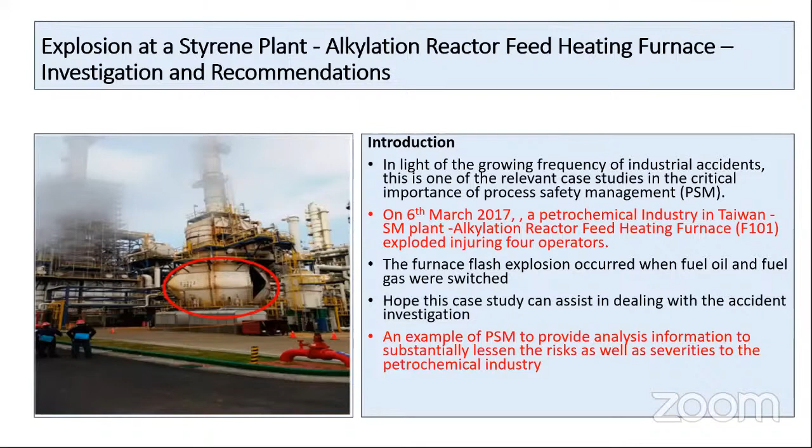Going to the next slide - process in brief. It is a petrochemical industry. I will go back to the first slide. In the light of growing frequency of industrial accidents, this is one of the relevant case studies in the critical importance of process safety management.

On 6th March 2017, a petrochemical industry in Taiwan - a styrene plant, styrene monomer plant - had its alkylation reactor feed heating furnace explode, injuring 4 operators. The furnace flash explosion occurred when the fuel oil was exchanged with fuel gas, that is, they were switched. Hope this case study can assist in dealing with accident investigation. It is an example of PSM to provide analysis information to substantially lessen the risks as well as the severities to petrochemical industries.

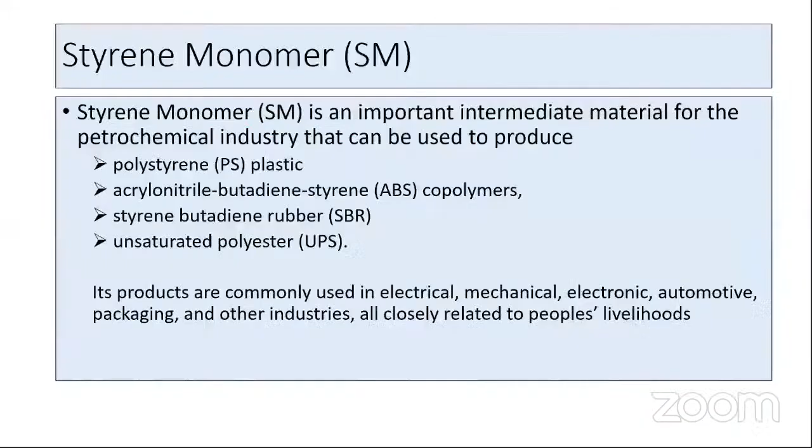Going back to the third slide - fourth slide, sorry. Process in brief. Is everybody with me? Yeah. In general, the styrene monomer manufacturing method is based on alkylation of benzene and ethylene. You can see in this figure, bottom right side, there is a reaction between ethylene and benzene.

Ethylene on the left extreme and benzene on the right top extreme both react in the alkylation reactor to give ethyl benzene. According to the process flow chart, before the raw materials ethylene and benzene enter the alkylation reactor, only benzene must be heated to reach the operating temperature of 700 to 800 degrees or even higher in the feed heating furnace, and then fed to the reactor where ethyl benzene is formed. Ethylene from the left extreme goes to the alkylation reactor, while benzene comes to the feed heating furnace.

Before coming to the feed heating furnace, the benzene is heated - only heated benzene can undergo alkylation with ethylene, at around 700 to 800 degrees centigrade. So it is heated in the feed heating furnace, and then fed to the alkylation reactor where ethylene reacts and gives ethyl benzene.

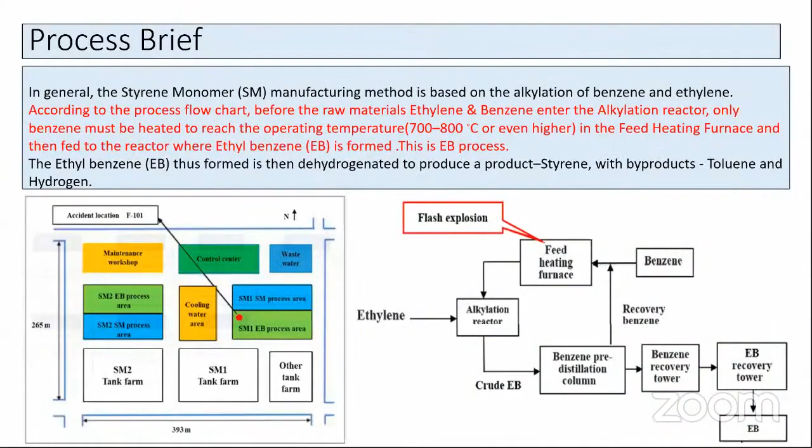At 4:30 to 4:36 a.m., they initiated emergency shutdown in the EB process area, which is the heating furnace area, and then the shutdown occurred. They shut down the ethyl benzene process area. It also damaged surrounding property, such as the ethyl benzene process area and the heating furnace, both of which had to be shut down and repaired.

Accident investigation. Some indirect possible reasons are as follows. After the heating furnace explosion, the operator did not shut down F101, the heating furnace, according to the standard operating procedure. The atomization of fuel and gas continued in the furnace, resulting in flashover under high temperature.

I want to explain here. He did not shut down the heating furnace and the atomization of the fuel. The fuel was in continuous operation, continuous running, and already the furnace was under heat.

During this, I will tell you one thing. From the running condition, fuel oil was initially used in the running condition, and in the running condition itself he switched over to fuel gas. So during this process, while he was using fuel oil, already the furnace surface temperature was very high.

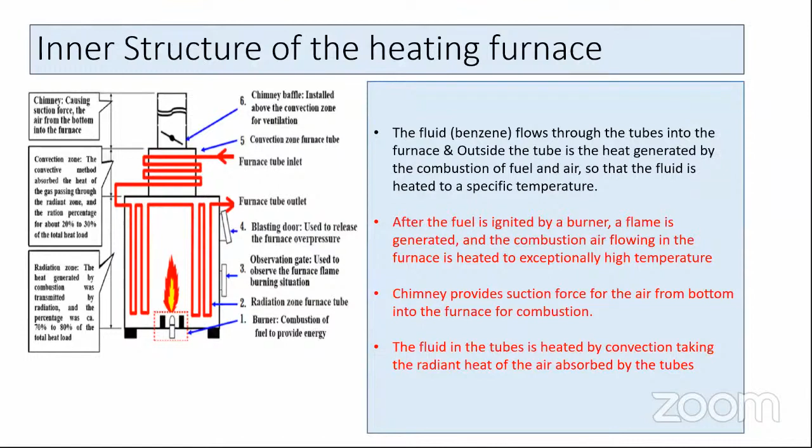Now he switched to fuel gas. So the fuel gas is coming from the burner whose flame was extinguished, and we have three elements now: the gas coming from the burner nozzle, the hot surface, and the air rushing up because the chimney is open. So we have three elements coming into the furnace, and it is enough to cause fire because the concentration is quite enough.

In the fuel adjusting period, the furnace produced black smoke. At this point, on-site staff discovered the flame extinguished and performed the adjustment. Then determined the fuel gasification caused the ignition, resulting in other burners' flames extinguishing instantly.

On-site response time during the abnormal situation was too short. Generally on-site we cannot control the situation because of explosions. On-site response time was very short, too short.

The blast door vent size was not meeting the requirements. I've shown in the chimney structure that the blast door vent size was not enough to meet the requirements. The pressure will be built up, and the pressure should be vented. The chimney's nearest opening is the blast door, which can release the pressure, but it was not enough. Suddenly, since the chimney was opened, it took that route, and the pressure increased and it blasted.

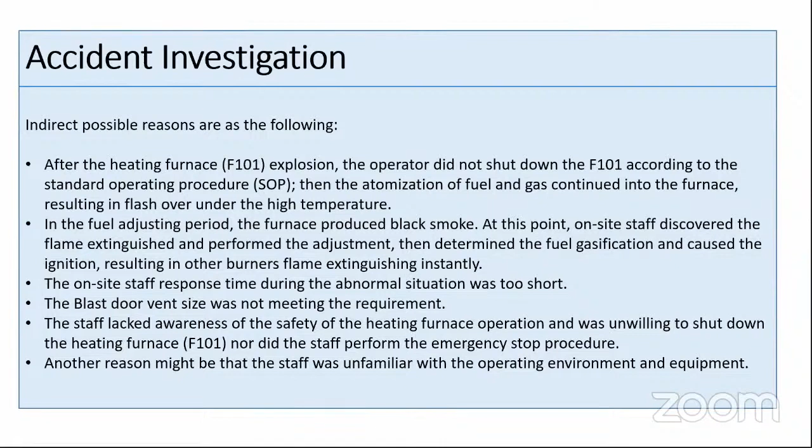The staff lacked awareness of the safety of heating furnace operation and was unwilling to shut down the heating furnace. Nor did the staff perform the emergency stop procedure. So overall, they are lacking awareness of safety of operation and safety of emergency too. Both things they are lacking. Another reason might be the staff was unfamiliar with the operating environment and equipment.

Okay, next slide. Accident investigation analysis. We have just taken the analysis. We have many methods of analysis. Here we have a picture of how accident identification works, so that we can identify the cause of the accident, and the assessment, control, and decision making, like qualitative analysis. The entire thing is a qualitative analysis system, and for risk analysis we have hazard identification. For hazard identification we can use Aloha and FTA.

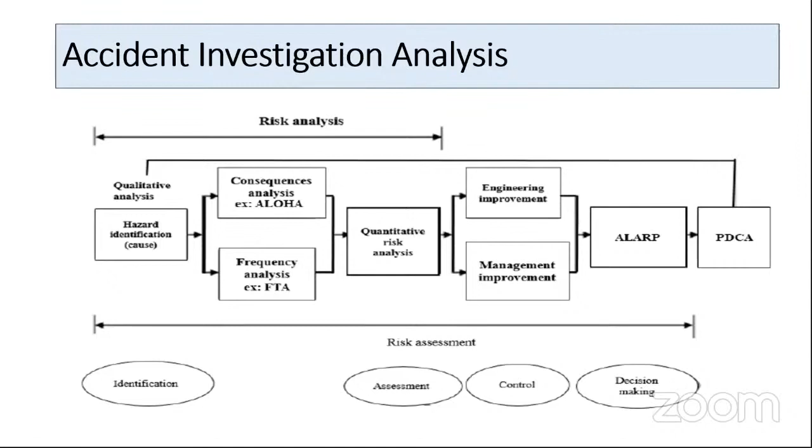Aloha is a software for consequence modeling, and FTA root cause analysis is a top-down approach. We can have that also, and quantitative risk analysis, where from hazard identification we can quantify the risks, and we have control systems, engineering controls and management controls. We have decision making ALARP. Since we have to get through the controls, we can get to ALARP, and we have the PDCA cycle: plan, do, check, and act for decision making.

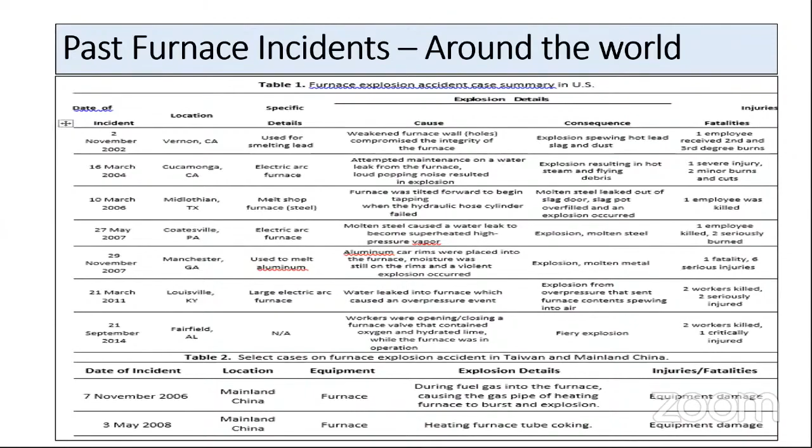This is about past furnace incidents around the world. We have a list of furnace incidents that happened around the world. I can discuss the causes in the next slide.

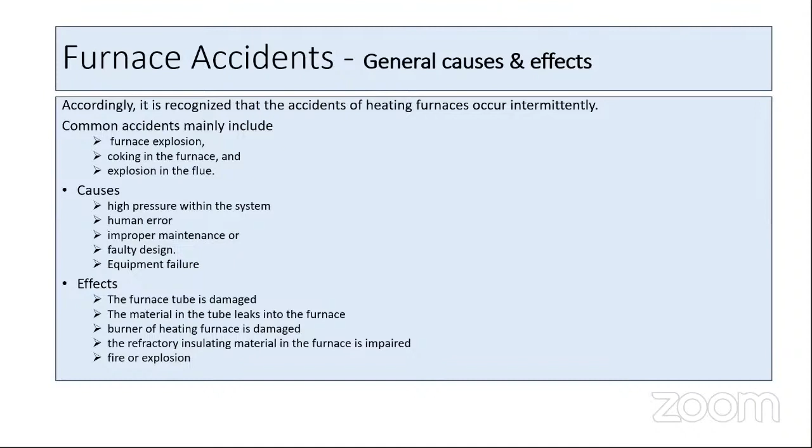It is recognized that accidents of heating furnace occur intermittently, and common accidents mainly include furnace explosion, coking in furnace, and explosion in the flue. The causes of accidents are high pressure within the system, human error, improper maintenance or faulty design, or equipment failure. Effects: the furnace tube is damaged, the material in the tube leaks into the furnace, the burner of the heating furnace is damaged, refractory insulating material in the furnace is impaired, and fire and explosion occur.

We have used the concept of hazard identification, risk analysis, risk control, and decision making. In hazard identification we already discussed Aloha and FTA, and for risk analysis, qualitative and quantitative analysis methods to implement risk assessment, and risk controls. We have engineering and management plans for decision making and so on.

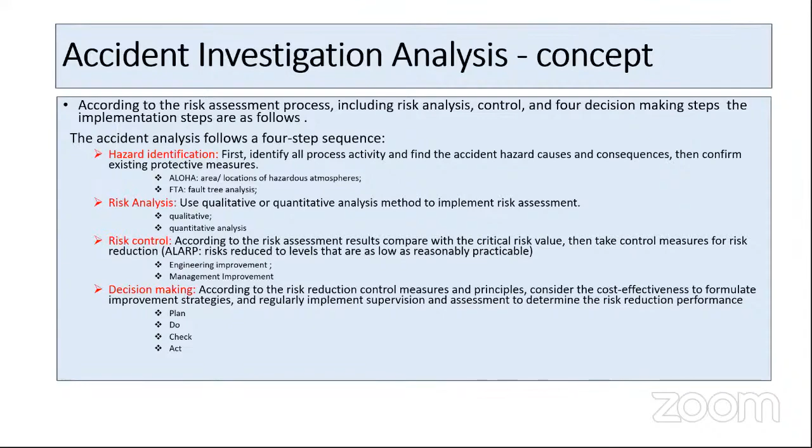For accident investigation analysis, we have PHA, the process hazard analysis element, and FTA. It forms a PSM element, process hazard analysis. One method is FTA, using what-if analysis, and event tree. That is the fault tree analysis concept.

Fault tree analysis was developed by Watson and A. Mearns at Bell Telephone Laboratories in 1962, in the area of the American telecommunication industry. It was first used in the telecommunication and aircraft industries for missile failures. FTA was applied to missile failures by the USA, and later NASA, other electronic industries, and software companies also started using it for safety analysis.

FTA is an effective tool widely used to find system reliability, maintainability, failure probability, failure rate and repair rate, and for system analysis. So for system reliability, maintainability, and safety analysis, FTA is a widely used effective tool.

FTA is a top-down approach with an undesirable event. You can see the figure with the top event. It is a top-down approach, meaning the first element is at the top - here, explosion occurred in the heating furnace. That is the top-down event, the undesirable top event, which is the explosion.

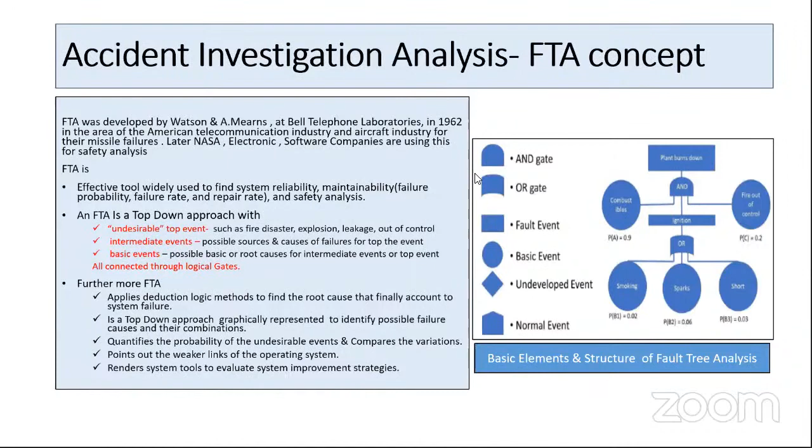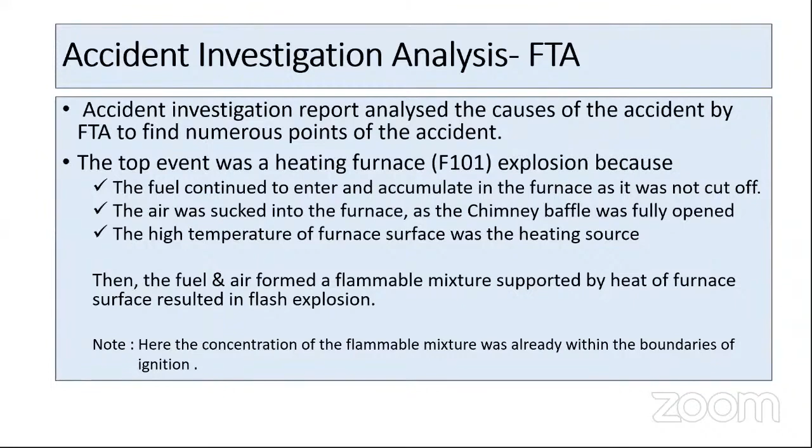Okay, next slide. Murthy, take another 5 minutes and you can close it. Okay sir, then I'll quickly go to... see next slide, you can see FTA. I'll go to the 17th slide. No, I'm not able to see the number. Okay, 14, that is okay. Keep that slide, that is very important.

See, we have this fault tree establishment tree. This is taking the heating source that heat furnace explosion. We have three things here: heating source, air, and excessive combustible materials. So we can draw our fault tree in this manner. We can give the names like T is our top event, X1 is X1, X2, X3 are the intermediate events, X4, X5 - all these things are just given as labels.

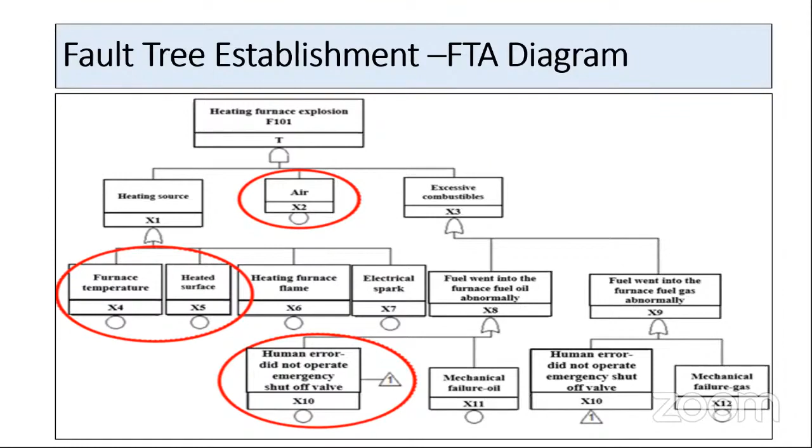So we will go to the 17th slide. I think go to the third slide. Next, third slide, I will tell you.

Using the basic fire triangle, we have flame, ignition source, oxygen, and fuel. Applying this same principle, we have developed heating elements - heating elements with furnace temperature X4, X1 is the heating source, and X4, X5, X6, and X7 are the heating sources: furnace temperature, heat surface, heating furnace flame, electric spark.

We have taken some possible causes. So X2 is air, X3 is excessive combustibles. Under that, other causes are abnormal fuel flow, abnormal gas flow to the furnace.

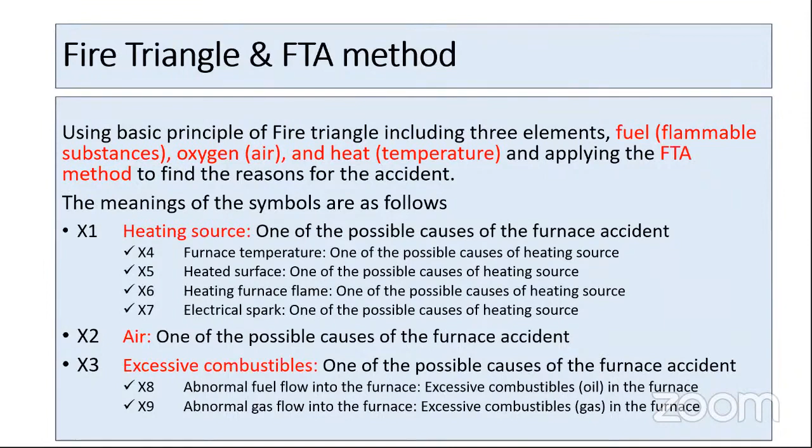Next slide, next slide.

X10 is human error, which is also a possible cause - did not operate emergency. X11 is mechanical failure due to oil, X12 is mechanical failure due to gas. T is the heating furnace explosion - that is the undesired event. So we can see intermediate events and basic events classified under this. These are the failure events - the intermediate failure events and the basic failure events. So the failure causes or events are one and the same.

So we will form an establishment tree, and then we will form some equations. T equals X1 - you have seen X1 is the heating source, X2 is the air, and X3 is the excessive combustible. So we go to the top undesirable event, and we can multiply the probabilities X1, X2, and X3.

Now we are taking failures into consideration. We can take two ways: one is air, fuel, and heating sources, or air, fuel, and human errors. We can get the top-down approach either this way or that way. So we have taken two equations, 2 and 3, just to remember. If you multiply all the elements one by one, you get this big equation.

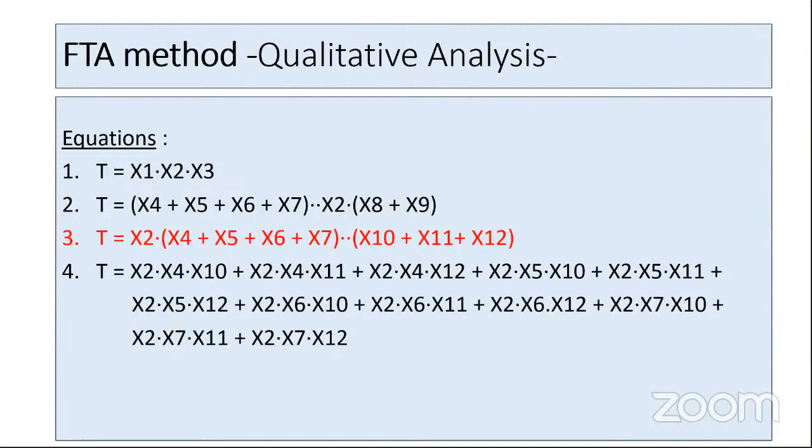Next slide. Each element multiplied to each other gives equation 4. Next slide. So we have minimum cut sets also.

This is another method. A minimum cut set is a combination of basic events which could lead to the top event occurring. It cannot be simplified further and still ensure occurrence of the top event. If the MCS is in a failed state, the entire system is out of order.

From the above results, we could find the key factors of the top event are air, any heating source, and human error or mechanical failure. In general, an MCS containing only one basic event - suppose the minimum cut set has one basic event, it's more likely to cause failure. Only one basic event will lead to more system failure than an MCS containing two basic events.

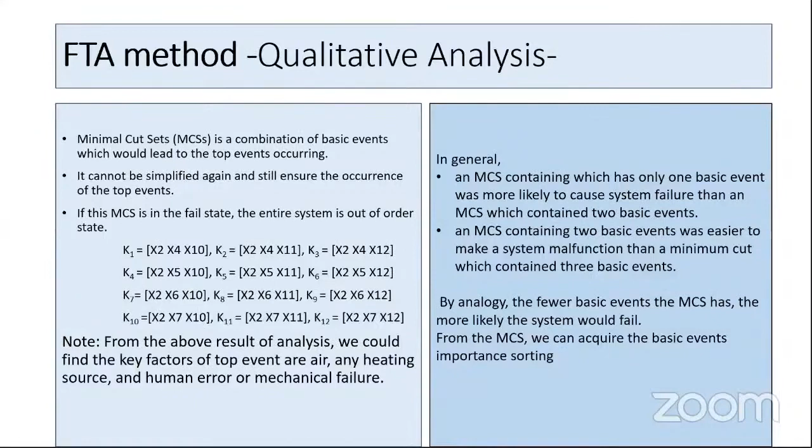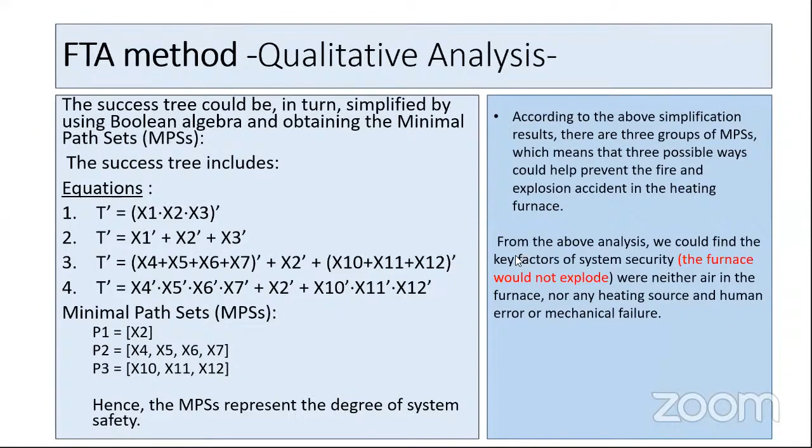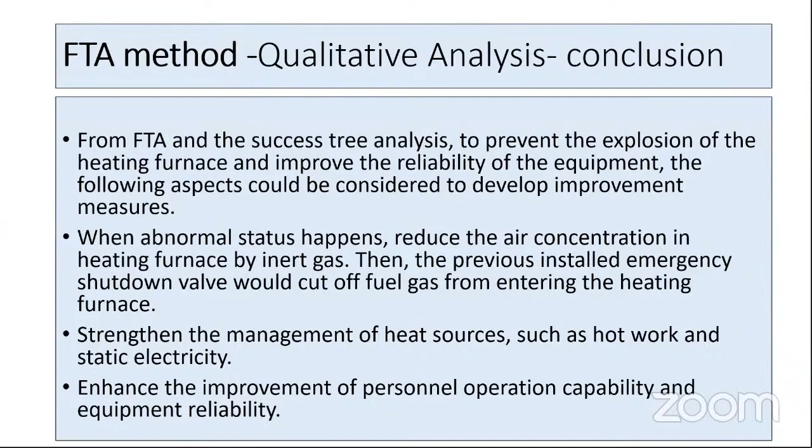This is the minimum path set. Minimum path sets represent success. This is another MPS method - if you have a minimum pathway, the furnace will not explode. So if you identify a minimum pathway that avoids explosion, it can be explained. We also have Aloha, which is a consequence modeling tool to analyze the minimum distance where the more significant impact of an explosion can occur.

Now let's look at results and analysis. We learned from this fault that it was caused by high temperature. The explosion occurred due to high temperature sources, mixed flammable gases, and human factors. Human factors include misoperation, misjudgment, untimely action, lack of training, and lack of skill.

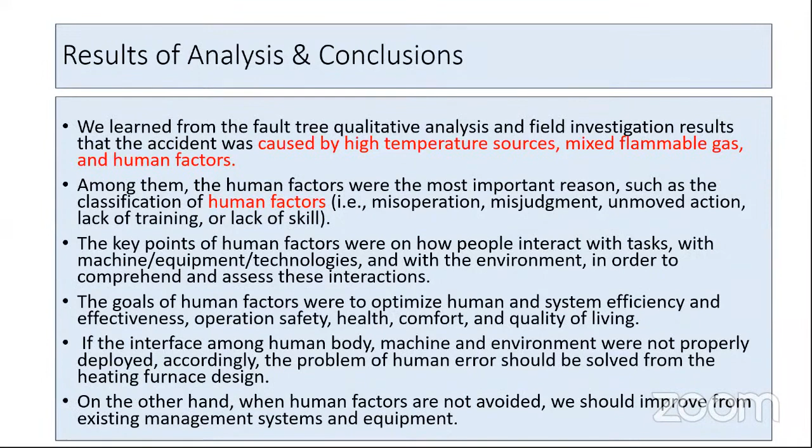Moving to recommendations. Through FTA cost-effectiveness analysis and investigation of the incident, the following recommendations are made: units with different specializations must cooperate with each other to investigate accidents and improve operating safety of equipment. Inherently safer design and mechanical integrity should be improved.

Develop procedures for MOC, management of change, when the heating furnace uses different fuels. MOC procedures should be developed to avoid increasing risk from exchanging fuels. We should use a single fuel instead of multiple fuels.

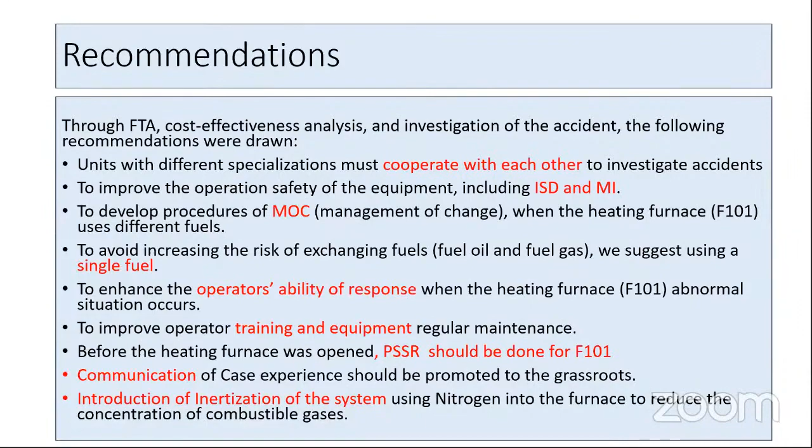Operator ability should be improved, especially for handling abnormal situations, through better operator training and regular equipment maintenance. Before the heating furnace is opened, PSSR should be done. Communication of case experience should be promoted down to the grassroots level for every person. Also introduce inertization of the system using inert gases like nitrogen into the furnace to reduce the concentration of combustible gases.

It was a little lengthy, sorry. Thank you very much, sir, for providing this opportunity.

The first and foremost thing is this presentation and information being presented is only for the purpose of education and experience sharing. So I don't want to quote anything, or say anything otherwise. This is not a place where I'm trying to blame anyone or any organization per se. So let's look at it as like three different companies.

One is company A, which is in the business of a city gas distribution company which is marketing CNG, and they are selling it out in southern India. Company B is in the business of natural gas value chain. It owns and operates a large network of pipelines and its associated assets. Company C is an integrated oil company, and they have oil fields, from which they are supplying gas to company B, and that goes back to company A.

So this is an incident which happened in company A. There was a cylinder explosion. These cylinders were used as a part of the value chain where CNG is being filled up, and it is being sent out to other places where they use these CNGs for filling up CNG filling stations for vehicles, cars, autos and things like that.

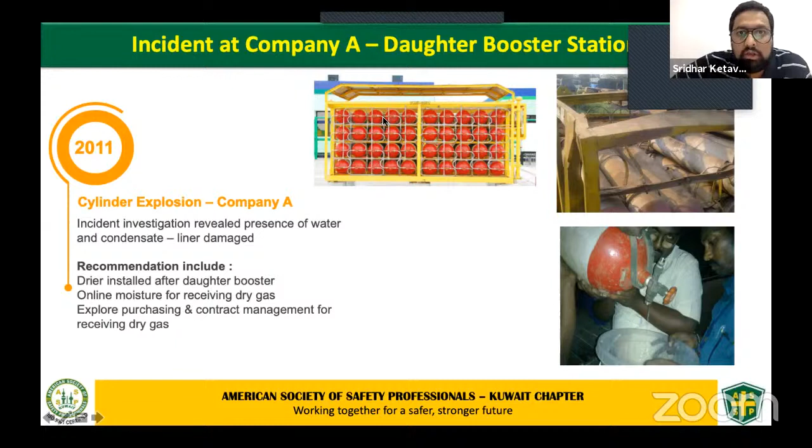So you're able to see the cylinders which are stacked. Can I just have a feedback please? Yes, we could see, yeah, perfect. So these cylinders are basically the banks. When we are having cylinder banks, you have the high bank and a low bank. This is exactly from the company's website which I had taken, so you can see that.

On the right side, you can see that one of the cylinders has had an explosion, and the top part of the beam was also damaged, and it flew up for some height, and then it just fell off. So then we were called in for doing an incident investigation. During the incident investigation we found that...

Anything? I'm sorry. Yeah, so anyhow, when we were trying to do the incident investigation, we found that there's a lot of condensate and water in the cylinders, which has been depicted in the other photo that is there.

Eventually, the recommendations which came out said to install a dryer, which is after the daughter booster. So the gas comes in from the booster station, and then there's a daughter booster which increases the pressure of the compressed natural gas, and then we wanted to have a dryer, and we also suggested having an online moisture analyzer for the receiving of dry gas, and to explore purchasing and contract management, because company A was always telling that company B is giving us wet gas. So this is an incident which happened in 2011.

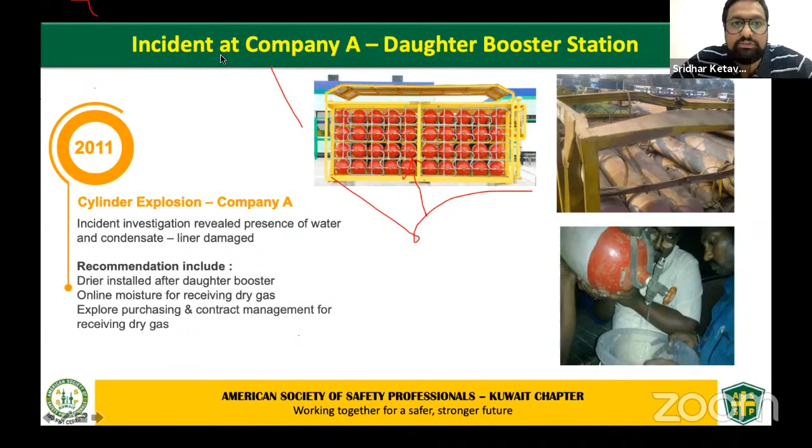Following that, what happened was, we had to do a HAZOP for a company B.

So company B, actually, when we were doing the HAZOP, that was in 2012, we performed it for their entire assets. During the HAZOP, since I was the chairman, I shared the information about what had happened in 2011 for company A.

Eventually, we came out with HAZOP recommendations: enhance the separation system at the company or supplier, have an online moisture analyzer, develop SOPs for some items, consider the frequency of periodic inspection and maintenance to ensure operability of the equipment, and ensure corrosion monitoring is also in place.

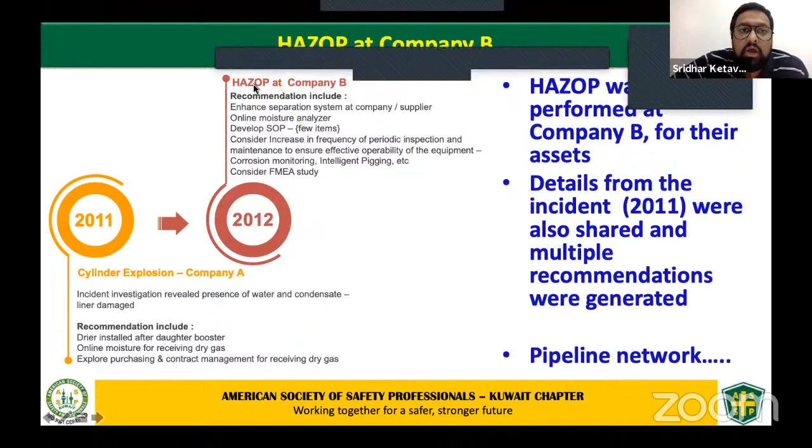So what happened in 2014 was there was a major incident involving an underground pipeline for company B, with about 23 fatalities and around 38 injuries. There was a significant amount of asset damage. Following such an incident, obviously government intervention comes up, and the government started investigating the issue.

I'll just play you a small video so that you can understand it a little better.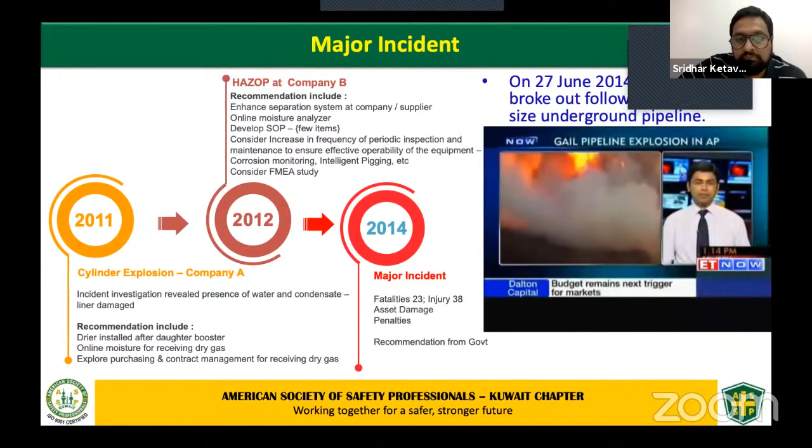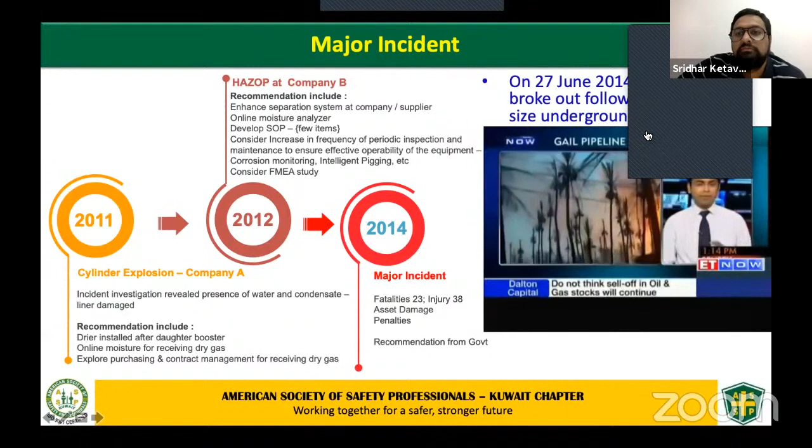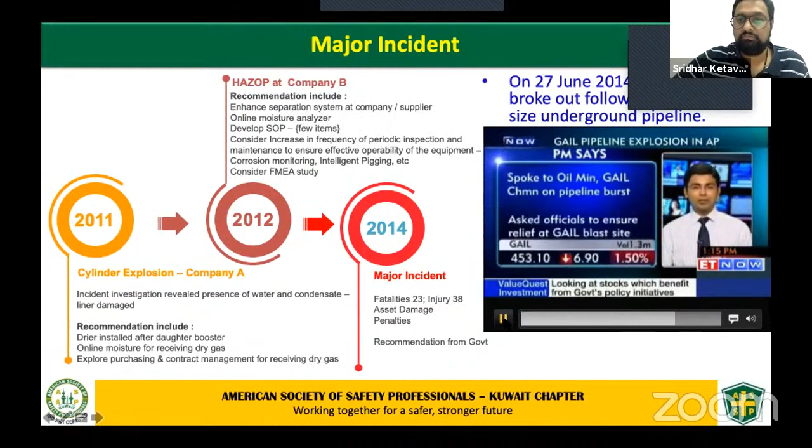An unfortunate incident, explosion in a GAIL-operated pipeline in Andhra Pradesh prompts ONGC to shut down 2 gas fields. Yatin's got details on that. Well, sad news - we have news reports coming in that the death toll has reached almost 14 people there in Andhra Pradesh. The news reports suggest the fire broke out from GAIL's pipeline, which was old and rusted, near ONGC's refinery in Andhra Pradesh, called the Tatipaka refinery. Because of that, both GAIL's operations carrying gas from ONGC's field and ONGC's refinery have been disrupted. Also, this pipeline operated by GAIL used to carry gas to Lanco Infrastructure's power plant in Andhra Pradesh, a gas-based power project, so that is also getting impacted. So totally three companies are getting impacted: Lanco, ONGC and GAIL. We also had the Prime Minister tweeting on this unfortunate event, clearly indicating that a high-level committee or inquiry commission would be set up to evaluate the incident. And also the oil and gas minister spoke on the issue to the press.

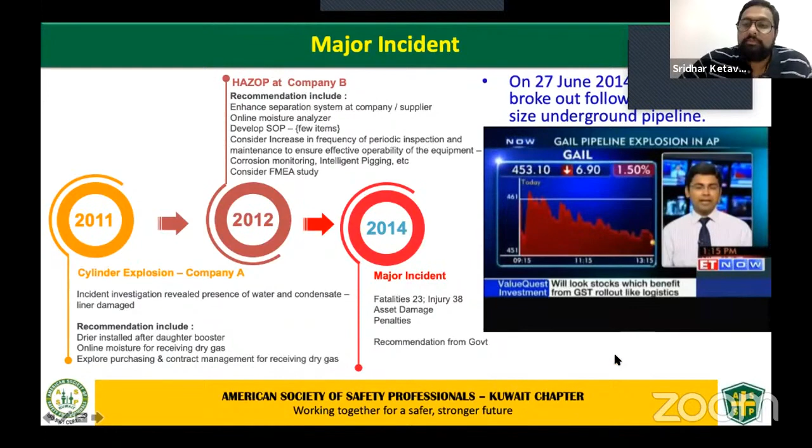Eventually, the PNGRB investigation report came out in 2015. This report clearly replicated most of the recommendations done in the HAZOP, which was that the pipeline was actually transporting wet gas. The company had also flouted the declaration that things were much better, and they were not providing a gas dehydration unit. Following that, they said they could not give fitness for purpose for the entire network.

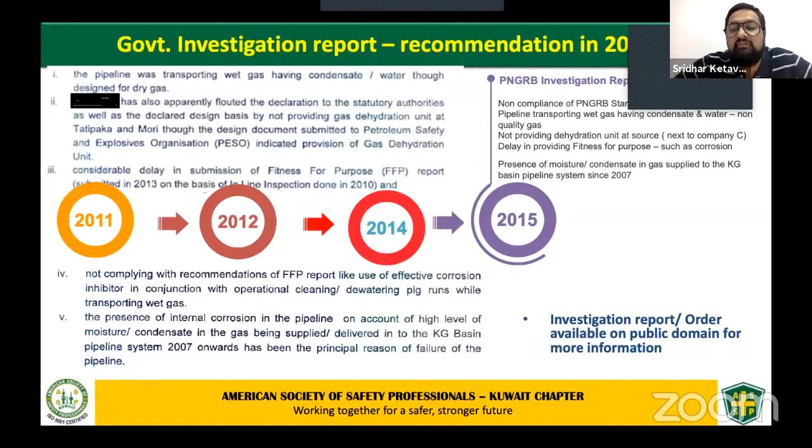There was internal corrosion present in the entire pipeline network. The presence of moisture and condensate coming up from the wells was being transported, and this had led to corrosion and other issues. This investigation report and other information is available in the public domain if you need more information.

So I'm sharing this as an experience because something which happened in 2011 was highlighted in 2012. They were also aware and understood many things, and were in the process of putting up a new pipeline and new setup - they were doing their best. But again, there are n number of things that come in when you're looking at such a large network.

In 2014, the incident happened. In 2015, the report came. Now I'm just trying to say that an incident which happens either upstream or downstream is always a big indicator. This should be considered a key important aspect to evaluate, and anything has to be tracked back to the actual source. If the source issues had been sorted out, I think many issues could have been avoided, including loss of life and safeguarding of assets. So this is what I wanted to share.

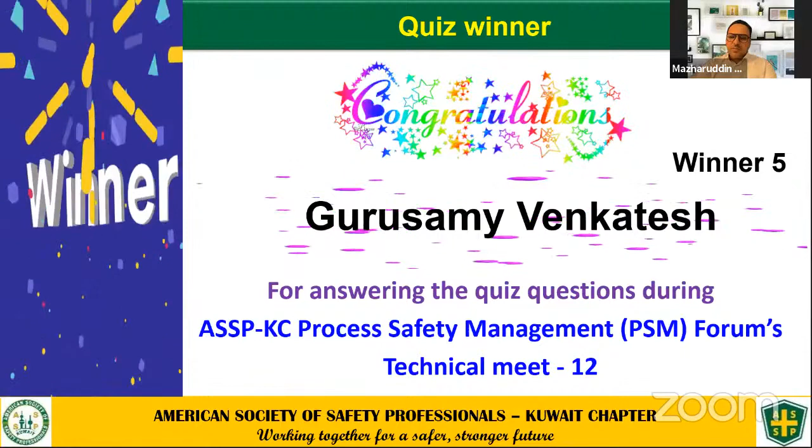Please come forward and join this team for another journey, which will be, of course, challenging, but I am sure and I commit to you, it will be a very wonderful and learning experience for all of you. So I think it is really fair to conclude now that the event was packed with wonderful knowledge and excellent informative presentations.